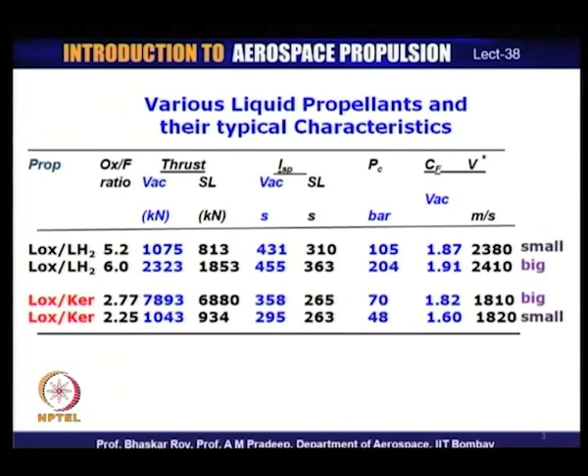Okay, so if we can now move on to some of the solid rocket performance parameters.

If we look at the fundamental issues that we have discussed before, one is that the rocket always uses propellant in terms of weight flow, and if we use that we get a weight flow of W dot, which as per continuity condition is decided by the grain area of the burning surface, the rate of burning, and the density of the grain at which it is being housed inside the combustion chamber.

Now, the burning rate, which is often a linear burning rate of a propellant grain, is given in terms of B subscript r, and that is A into Pcc to the power n, where Br is normally measured in terms of something like centimeters per second. Millimeters would be a little larger value, and meters could make the number a little rather small. So centimeters per second could be a proper choice of units for burning rate.

On the other hand, the numbers given here in terms of A and n are the burn or combustion indexes for the grain. Now these numbers depend on the grain design and the grain composition, and hence they are decided by the choice of grain that one is using for this particular rocket. Pcc, of course, is the combustion chamber pressure.

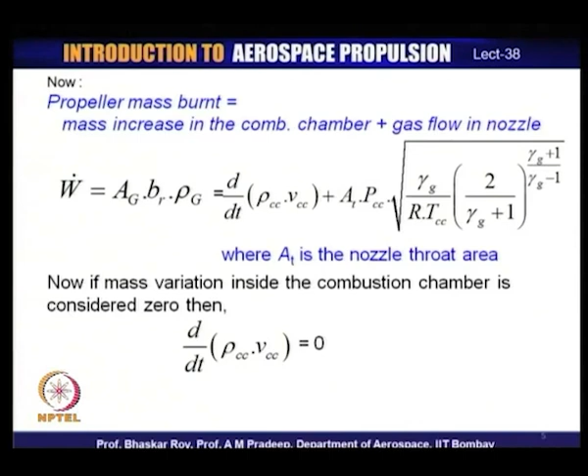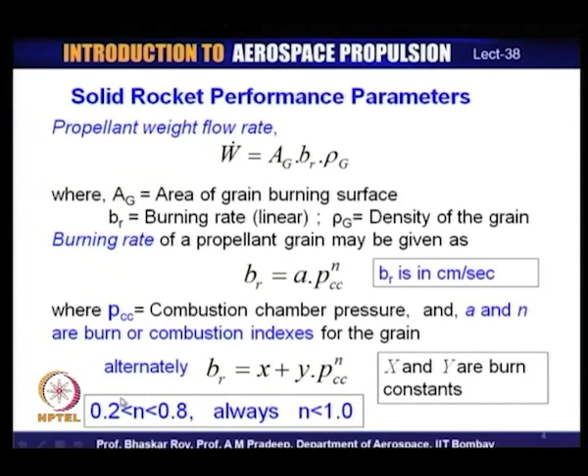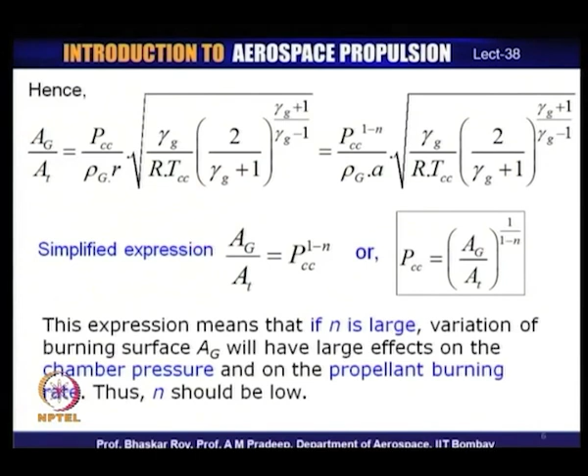If we look at the last slide, we have seen that the value of n should be less than 1, and preferably somewhere between 0.2 and 0.8. So those are the numbers we were talking about, and now we see that n should be somewhat on the lower side and certainly not anywhere near 1, which could possibly lead to explosion of the rocket motor. So these are certain fundamental issues that can come out of the simple theory that we are doing.

Now, the burning rate that we are talking about, we have written down simply in terms of Br equal to A into Pc to the power n.

Now, this is a simplified expression, a simple way of mathematically capturing the burning rate, and gives us a first-cut notion about what the burning rate could possibly be. In engineering, one always likes to have a calculated number which gives us some idea about what is happening.

In reality, the burning is dependent on a number of parameters or factors. As you can see, burning is a function of the chemical composition of the propellants, the geometrical shape of the solid rocket grain, the initial temperature at which burning was initiated, and the fabrication process, which is very important.

There is a lot of mechanical engineering we have discussed before, that it needs to be designed properly. The radiation, after combustion is initiated, the combustion produces radiation, and this radiation could affect the chemical and physical properties of the grain.

So, inside the grain body, since it is housed right in the combustion chamber itself, whether that is an important issue needs to be figured out before the grain is put inside the combustion chamber. So the radiation burning characteristics of the grain need to be ascertained before it is placed inside.

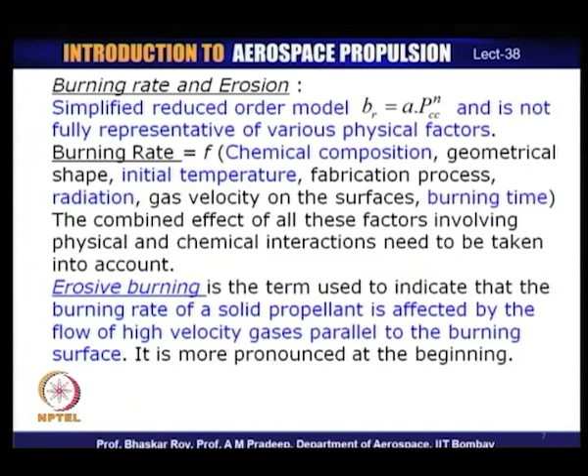Now, some of the general points we have discussed with reference to solid propellant grains - how they are designed and how they finally perform - can be put together.

The combustion pressure is not uniform along the length of the chamber, with the fastest burning rate near the front end. So the combustion chamber pressure varies from one end to the other.

For some time it may reach a steady state, but that is probably for a very short time, depending on the rocket size and chamber design. We have to accept the fact that the chamber pressure is not uniform.

One reason we have to keep this in mind is because we have used combustion chamber pressure as a figure of merit for calculating various rocket performance parameters. We must remember this chamber pressure itself may not be constant - it may be a variable parameter - and hence rocket performance will have to be recomputed with variation of combustion chamber pressure.

The other point is that the gas, when it starts moving, incurs pressure losses.

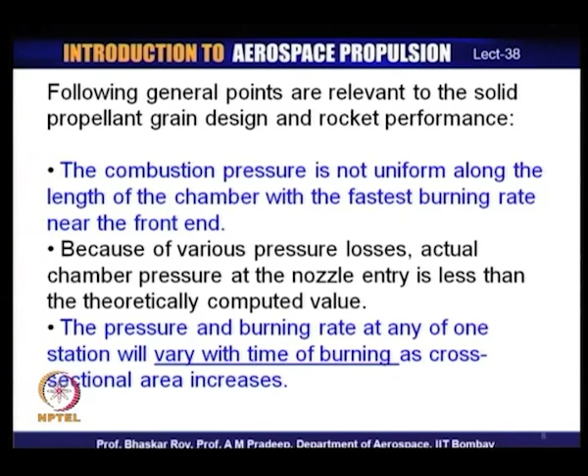The pressure and burning rate at any station will vary with the time of burning, because the size and shape of the grain keep changing. The cross sectional area shown is quite often changing, and as a result the time of burning and many issues connected to grain burning would change, because the grain shape and size are changing. It depends on what the original shape and size was. A simple cylindrical end-burning grain will not change a great deal, but other shapes can change quite a lot during burning, and hence the pressure created and the burning rate would vary with burning time—meaning during rocket operation, the pressure and burning rate continuously vary.

The other possibility is regressive, where thrust, combustion chamber pressure, and surface area continuously decrease most of the time in a certain manner, depending again on the grain design, how the grains are used, and their composition. The third possibility is neutral burning, where the thrust, combustion chamber pressure, and burning surface area remain approximately constant during most of the burning of the rocket grain.

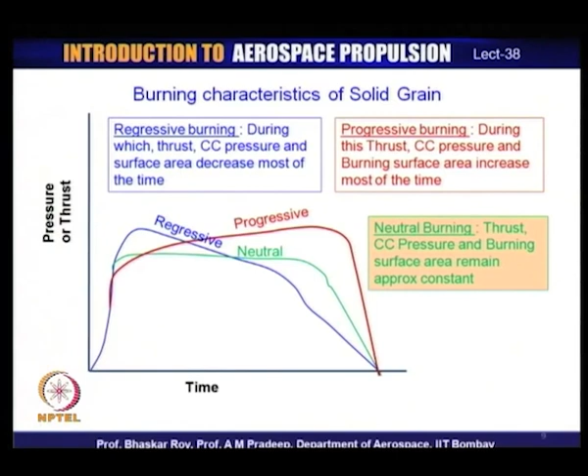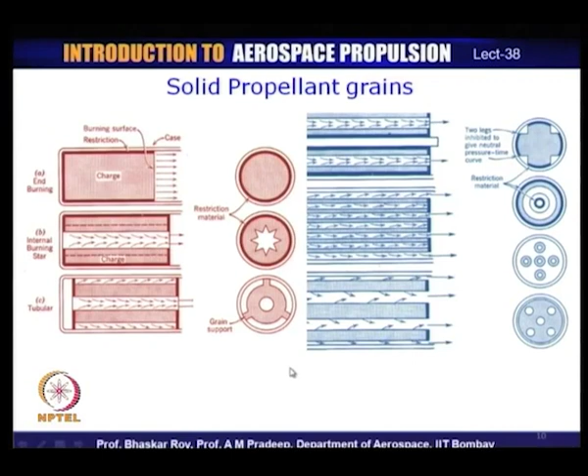If we look again at the grains we examined before, we can see that some of these grains have been designed to create certain neutral characteristics. Most of these grains indeed have more or less neutral characteristics, and to achieve that, some of them have restrictions imposed on their surface areas, so those surfaces do not burn—only certain open surfaces are allowed to burn. These are the methods by which neutral burning capability can be built into the rocket grain design. Most of them are designed pretty close to neutral burning characteristics.

Now we look at what we can call the nozzle characteristics.

We have been talking about liquid propellants and solid propellants. All of them finally create thrust with the help of rocket nozzles or exhaust nozzles.

We have seen that most combustion chamber pressures reached are indeed very high, and rocket nozzles normally operate with pressure ratios of the order of 25 to 30 at minimum, and some could very well be operating with pressure ratios of the order of 100. This indicates that the nozzle operating with that kind of pressure ratio would almost invariably be a convergent divergent type of nozzle.

This condition imposes that you always have critical flow in the nozzle throat. That means the nozzle is always going sonic somewhere around the throat, and the exhaust is almost always supersonic. Very rarely do you have a rocket nozzle which is just sonic or subsonic. So rocket nozzles almost invariably have supersonic exhaust created by convergent divergent nozzles.

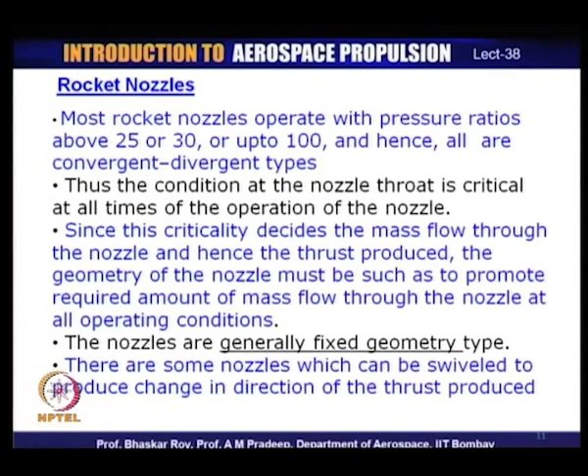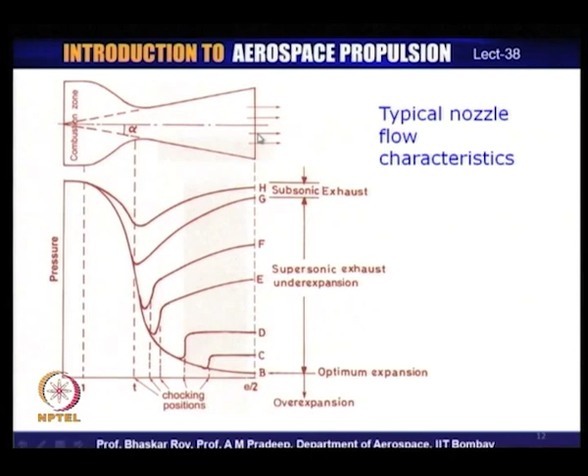The effect of under expansion is reduction in the exhaust velocity, and therefore the lowering of the exit kinetic energy and lowering of thrust production. This is something we have to be really worried about, because if you have under expansion, the thrust is actually going to go down, and as a result your rocket performance will be affected.

On the other hand, if you look at over expansion, it could actually lead to a situation where you have separation inside the nozzle, because the flow has already reached the ambient pressure inside the body of the nozzle. It cannot expand anymore, pressure cannot go down anymore, and hence the nozzle would actually show a separation tendency inside the body of the nozzle. This is again a bothersome affair, as the nozzle would be highly underutilized and it could create certain problems.

If, for example, the separation is symmetrical, the thrust produced would be affected, but the direction of the thrust would not be affected. On the other hand, if you have asymmetric separation, the thrust produced could be essentially asymmetric, in which case if you have asymmetric separation around the exit of the nozzle, the rocket itself could lose its trajectory, or take a different trajectory than what it was designed for, and go in a different direction altogether.

So this is a problem: if the exhaust jet coming out of the nozzle experiences separation inside the nozzle body, and that separation happens to be asymmetric in nature, the thrust produced would not only be in the direction of the initial travel, but it could start producing thrust in a sidewise direction, in which case the rocket would have a sidewise motion, meaning it could have a trajectory different from what it was intended for.

So this separation is normally not a very expected or definitely preferred kind of separation. If you have separation, ensure that it is symmetric, not asymmetric. Now, having said that, it is entirely possible to deliberately create asymmetric separation to aid the process of rocket trajectory, and we shall see in a few minutes how this is done. So the separation inside the nozzle body can indeed be controlled to control the rocket trajectory.

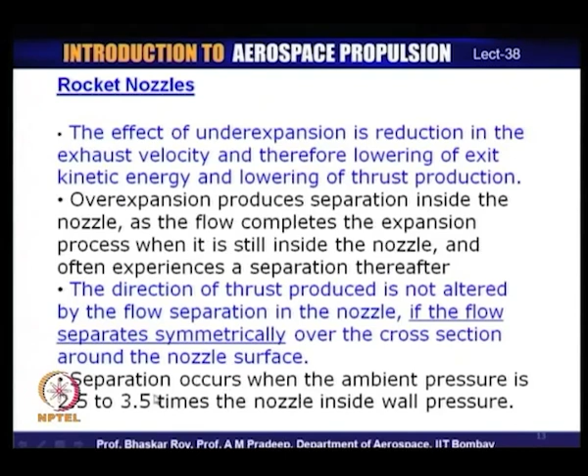One of the ways of figuring out whether you are going to have separation is to see whether the ambient pressure is 2.5 to 3.5 times the nozzle inside wall pressure. That is a ballpark figure, and it could give you some idea whether you are going to have separation at all. On the other hand, if the nozzle is designed for full expansion, which it often is at high altitude, it is likely to give higher than ideal thrust at sea level, where the ambient pressure is on the higher side.

You could have an ideal thrust calculated at sea level, but you could end up actually getting more thrust than calculated at the beginning, if it is designed such that full expansion actually occurs at high altitude, and it is often designed that way.

The characteristic velocity, which we defined in an earlier lecture, is independent of the nozzle shape and is dependent on the fuel and oxidizer chemical properties, the combustion chamber design, and the thermodynamic parameters after combustion, that is the temperature, pressure, gamma, and other values. So, the characteristic velocity of the rocket is not dependent on the nozzle shape.

This definition implicitly assumes that we are talking about a fully expanded ideal nozzle. So, whatever has been said about characteristic velocity, it is implicitly assumed valid for a fully expanded ideal nozzle.

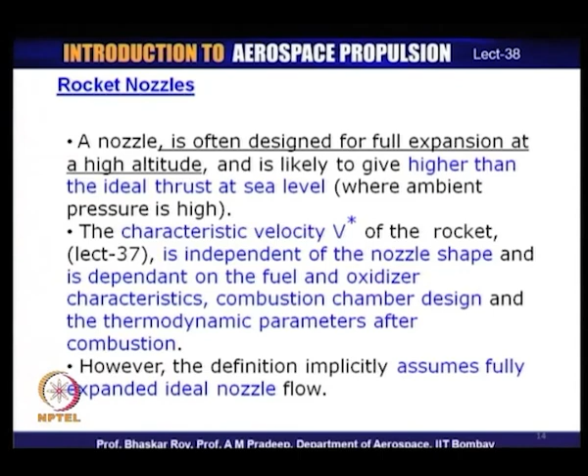Now, most of the nozzles used in rockets are circular. You will very rarely see a rocket cross section which is square, elliptic, rectangular, or any other shape. They are almost invariably circular, and one of the reasons is what we just discussed, that if you have a separation, it should be symmetric separation all round, that is, unintended separation.

As I mentioned, we could have intended deliberate separation, but that is a separate issue we shall discuss in a few minutes. Unintended separation must always be symmetric, and for that to be symmetric, the rocket nozzle must have a circular cross section, but it could be of various different shapes.

Now, these shapes are decided by design. Between the throat area and the exhaust area, once you calculate, there are infinite possibilities of shapes. You have to create that shape depending on the aerodynamic and gas dynamic analysis of the rocket flow under various operating conditions. So, the circular cross section is constant, but the flow track shape could vary wildly from one rocket to another.

One of the parameters is the diameter of the subsonic part of the nozzle, and that is governed by the volume of combustion, because coming from the combustion chamber, size of the grain, which is the combustion chamber of the solid propellant rocket, and the size and arrangement of the injectors, which is true for liquid propellant rockets.

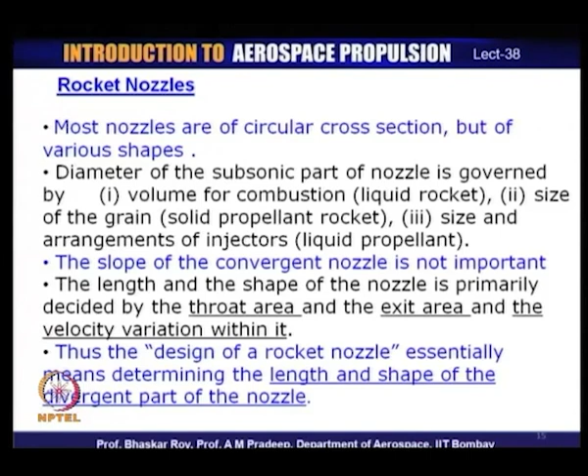So, between the throat area and the exit area, the nozzle is shaped, and this is the nozzle design we are talking about—essentially creating the length and shape of the divergent part of the nozzle, where the flow is always supersonic. So, it is the supersonic nozzle design which is the most important part of the nozzle design.

The selection of this divergent shape can be made based on certain simple criteria, and we will write down some of the simpler criteria that need to be followed.

A large divergence angle makes the nozzle very short, giving very low friction loss. On the other hand, a small exit diameter—if it's not available, or you want to give one—gives low aerodynamic drag of the vehicle.

That means the vehicle could become thinner and narrower, but it could increase the length of the nozzle and surface area, which would increase the weight of the rocket engine. It also increases the surface area, which could increase pressure loss through the rocket nozzle, decreasing the discharge coefficient slightly.

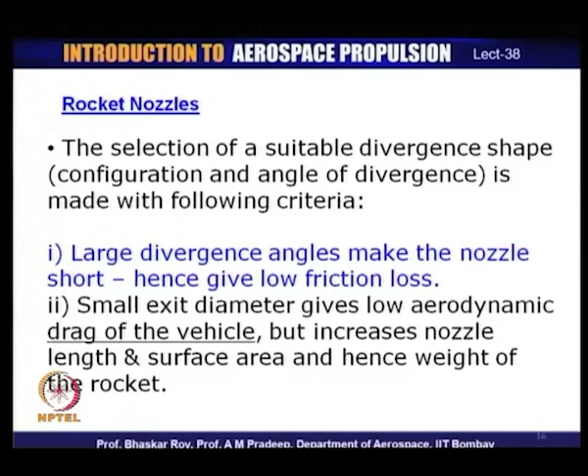A nozzle, being a duct, has its own discharge coefficient. So, these are some of the simple issues one needs to keep in mind in the rocket.

If you have a large divergence angle, the exit produces a radial component of the flow. Now, if the flow is going out radially, non-radially, the radial components of the flow will create forces.

What we want is thrust going out absolutely axially, so that you have axial reaction and get axial thrust. If you have flow going out at an angle, it will have a sidewise component of thrust. Now, if you have a symmetrical body of the rocket, the exhaust forces are symmetrically distributed, hence they would cancel each other. However, those forces in terms of energy are lost, and are not available for thrust production.

So a lot of energy is expended in creating a sidewise thrust all round. Maybe they will not affect the motion of the rocket, but the energy is being lost in creating those forces, and hence those are non-thrust producing components, which are of no use as far as energy usage is concerned. So the large divergence angle is not exactly a very preferred nozzle shape.

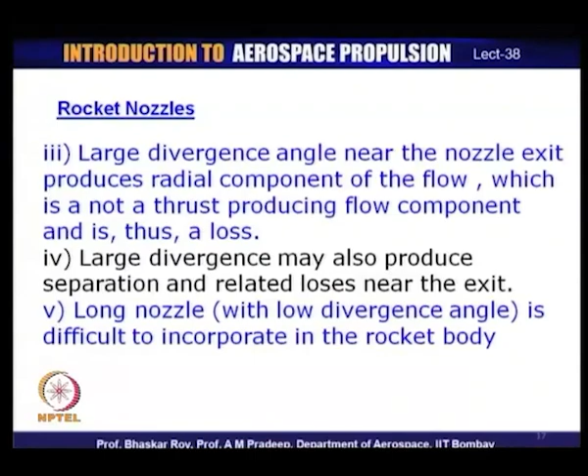The large divergence has another issue, and that is the flow, under certain cases of overexpansion, when it reaches very close to overexpansion, could produce separation, and the separation would immediately create losses near the exit. Now remember, this separation is in supersonic flow, so we are talking about supersonic flow separation. Large divergence could produce supersonic flow separation, creating shocks and other issues inside the body of the rocket nozzle, and something nobody would like to see happening inside the nozzle body.

It will affect the production of thrust, it will affect the trajectory of the rocket, the motion of the rocket itself, so we do not want any of those things happening inside the nozzle body. A very long nozzle is often difficult to incorporate in the body of the rocket, and you would not like to have it very long. So you do not want a very large divergence angle, and you also do not want a very long nozzle.

As a result, most rocket nozzles often have some kind of bell shape, and this bell shape is to be defined, with the exact curvature designed by the rocket designer, the nozzle designer. This is what nozzle design is indeed all about.

Let us quickly look at some of the nozzle design issues. If we look at the same diagram which we had looked at before, supposing this is your throat, this is your exhaust area, and the distance from here is taken as x. Station 3 is where you start off, and station 1 is the combustion chamber zone.

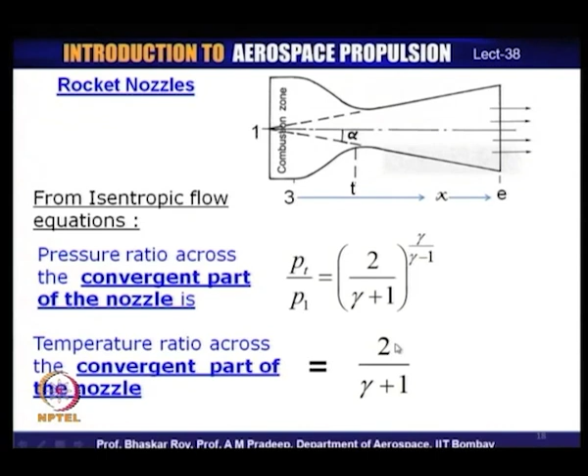So the pressure ratio across the convergent part of the nozzle is given simply by the isentropic flow equations, which you have done before in your thermodynamics courses by Professor Pradeep, and this ratio is available for criticality. Remember, flow is always critical in the nozzle. This is the temperature ratio across the convergent part of the nozzle, again from the isentropic flow equations. We are assuming flow is isentropic and the gas is an ideal gas.

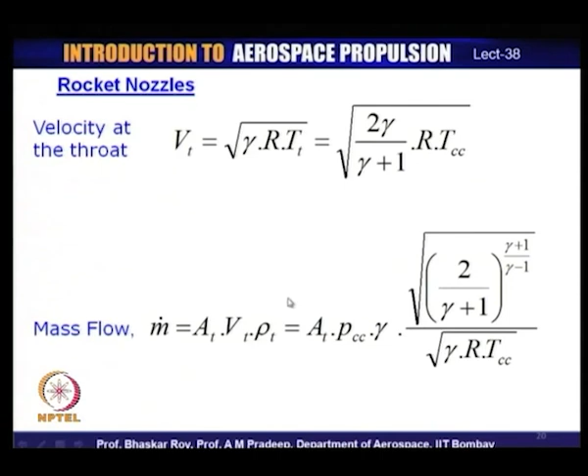If you look at the velocity at the throat, that comes from the critical condition, and you can relate it to the combustion chamber temperature, which is convenient, because finding the throat temperature could be difficult, but combustion chamber temperature is often predictable, and you can predict what the velocity at the throat would be under certain operating conditions. That gives us the mass flow — the throat area is known, the velocity is known, and if the density can be computed, you can get the mass flow through the nozzle from the continuity condition.

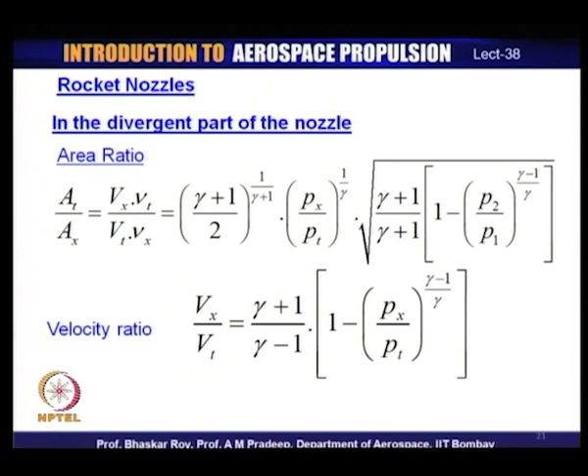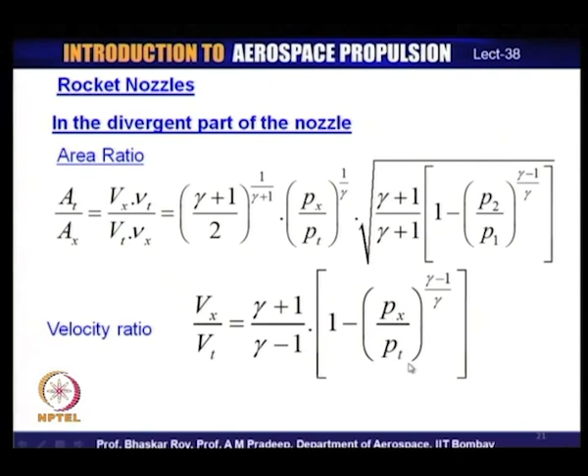Now, if you continue into the divergent part of the nozzle, the area ratio between the throat and any point in the divergent part can again be found using the isentropic relations. As I mentioned, we continue to use the isentropic relation, assuming the flow is indeed isentropic, and it gives these relations in terms of the fundamental gas dynamic parameters. The velocity ratio at any point from the throat can also be found from simple isentropic relations using the gas constant and the pressures at the throat and at any operating point of the nozzle.

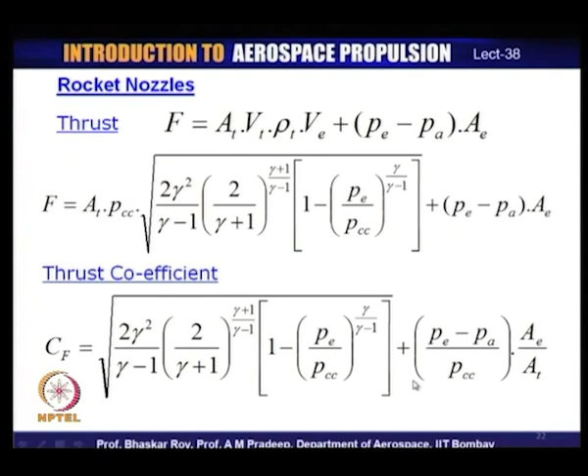The rocket nozzle thrust can be found by looking at the thrust values discussed before: the first is momentum thrust, the last is pressure thrust. These can be written in terms of the nozzle parameters we discussed. The first part depends essentially on nozzle design and parameters, while the second is the residual pressure thrust. The thrust coefficient defined earlier can now be written in terms of simple gas dynamic parameters generated from the rocket nozzle operation.

Rocket nozzles can be of various kinds, and the equations we've just written apply to any of these nozzles. If you want some control over what happens in the nozzle, as I mentioned earlier, you could create an asymmetry inside it.

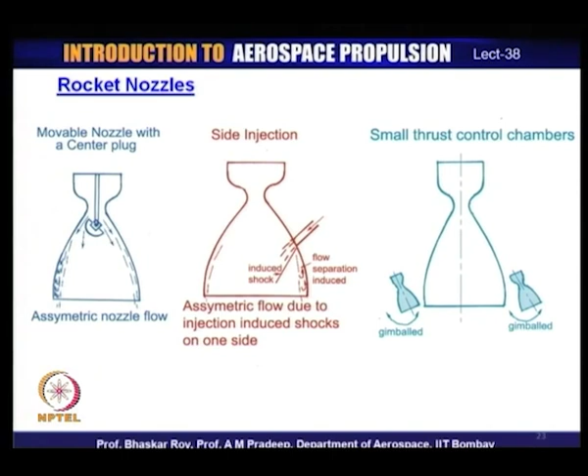These are the ways a rocket nozzle can be used to control the motion of the rocket. I will leave you with a picture of a rocket launch.

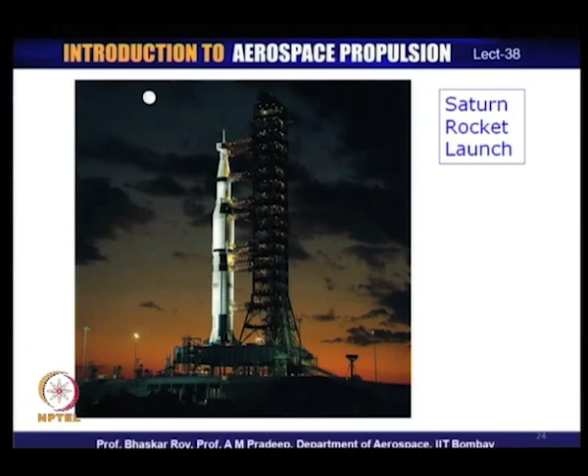The gas comes out from the bottom and flows sideways to create a soft lift off, and during that soft, slow lift off, these fixings are released automatically and the rocket is released to go up vertically. This structure may remain or may fall off. This huge structure was built for the Saturn rocket launch, used for many of the Apollo missions conducted by the US quite some time back.

We have been discussing rockets, spacecraft, and missiles, and we see that the fundamental issues are of the same order. We have discussed some very fundamental sciences that govern these crafts. I hope it will be possible for you to go into other courses which take you to higher levels of rocketry and rocket science, but until then, I hope you will be able to look at any rocket today and understand how it functions and how it is used for its particular purpose.

In the next lecture, we shall close down this lecture series on introduction to aerospace propulsion, and we shall recount some of the things we have done, and look forward to what could possibly be the future of aerospace propulsion.